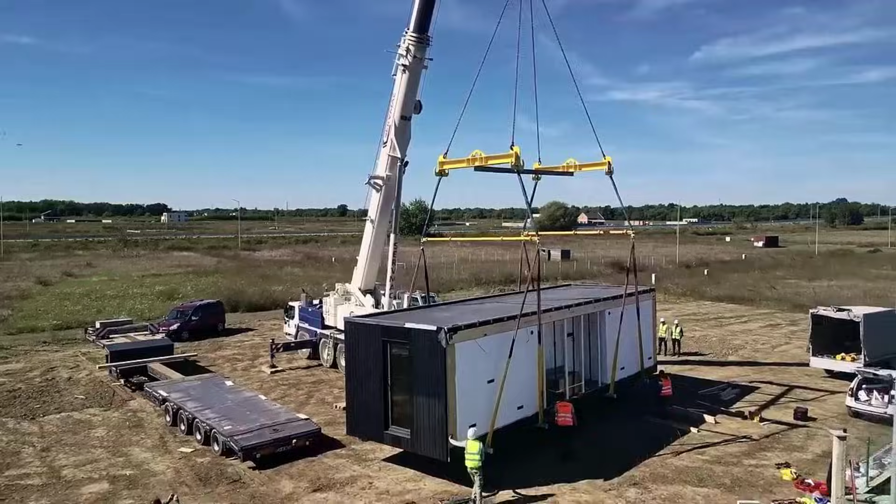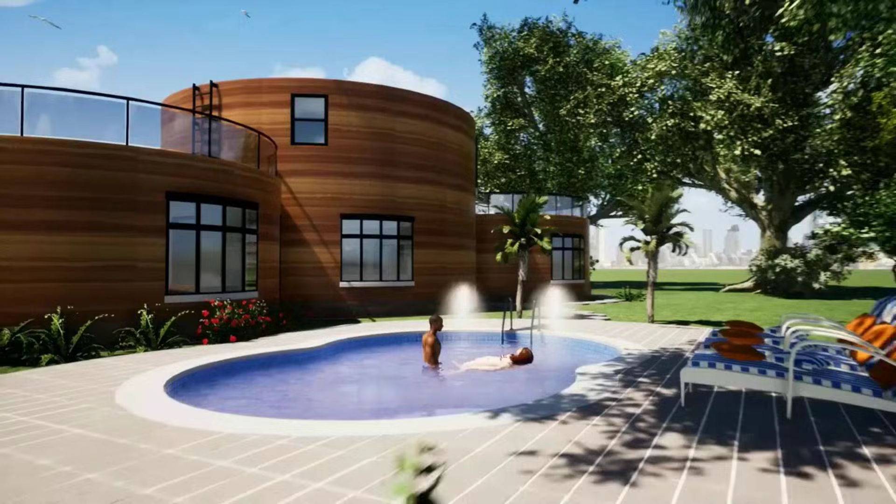We did not stop building self-heating homes because they failed. We stopped because a house that heats itself is a house that cannot be billed. A home that needs no furnace is a furnace that cannot be sold. And a family that owes nothing for warmth is a family that cannot be controlled.

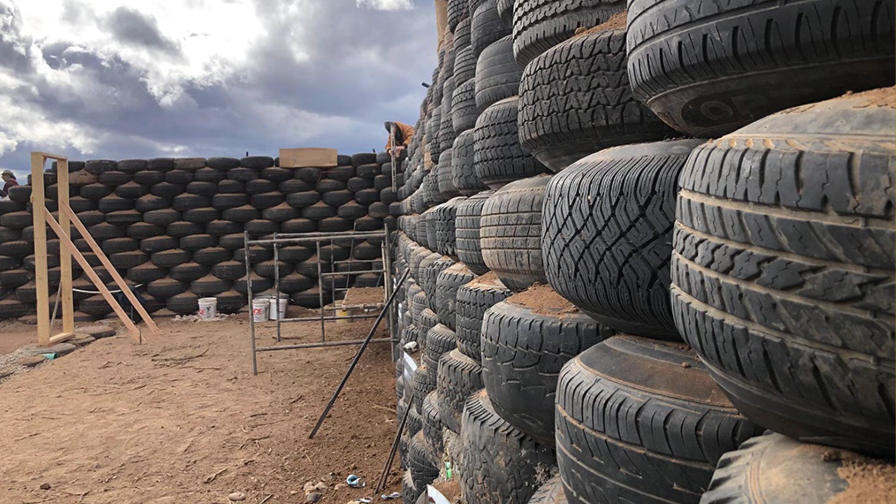This is the story of the house that needs no fuel, the building method that outlasted every empire that used it, and the industry that spent billions making sure you never learned how it works.

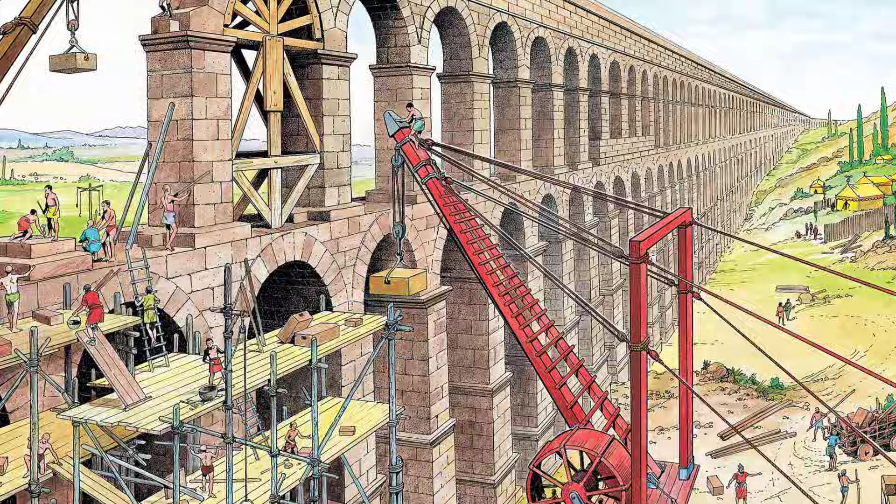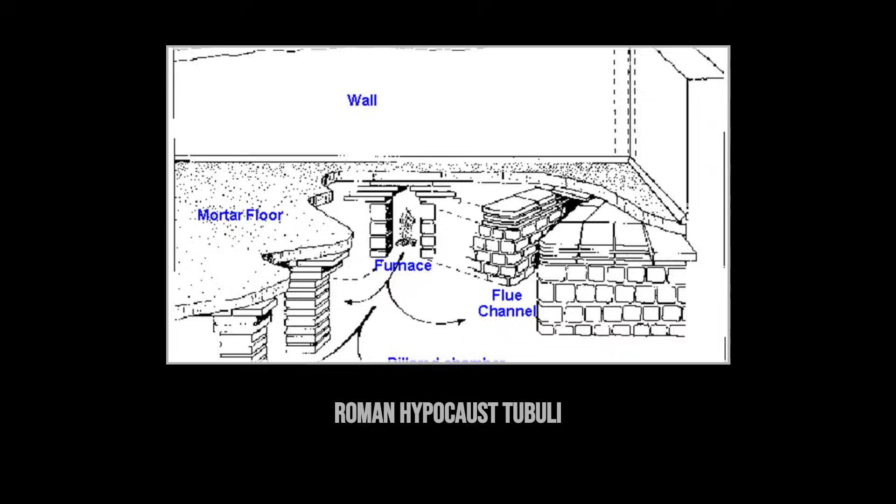500 years later, the Romans turned sunlight and stone into an engineering masterpiece. They called it the hypocaust. Picture this. A stone floor raised 2 feet on hundreds of small brick pillars called pilae. A fire burns at one end of the building. Hot air rushes beneath the raised floor, snaking through channels in the walls called tubuli. The stone absorbs that heat for hours. The fire dies. The floor stays warm.

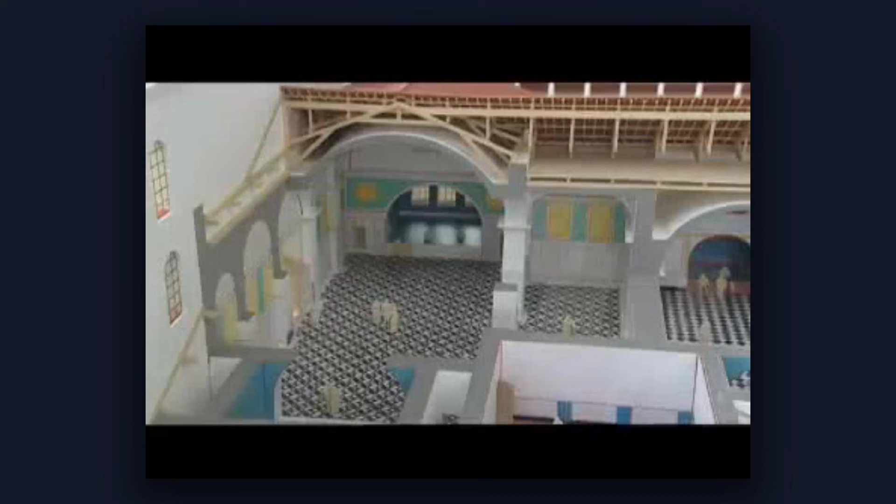In 216 AD, Emperor Caracalla opens the greatest bathhouse Rome has ever seen. The Baths of Caracalla cover 27 acres. They hold 1,600 bathers at once. The heated rooms span more than 10,000 square feet. And the entire complex is warmed by a single fire feeding hot air beneath stone floors and through hollow walls. The thermal mass of that stone held heat long after the flames went out. Bathers walked on warm floors while snow fell on Rome.

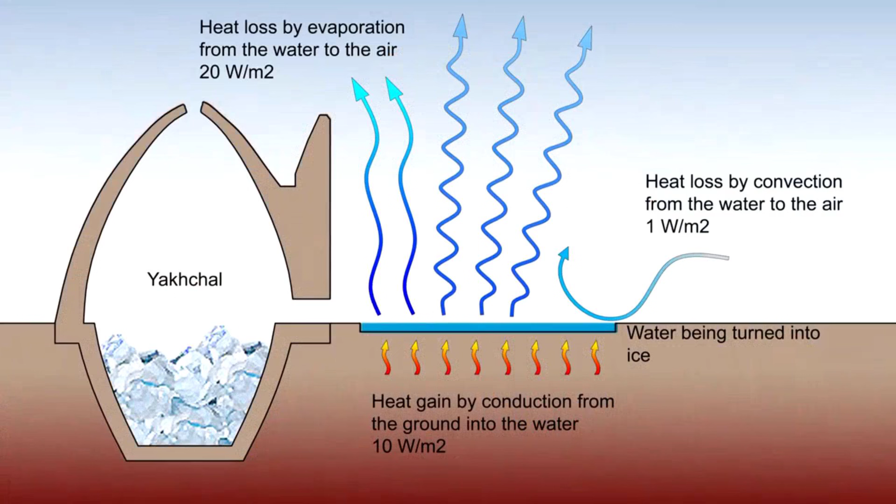Meanwhile, in Persia, builders solved the opposite problem. They kept ice frozen in the desert. They built yakhchals, domed structures with walls 6 feet thick made of packed earth mixed with lime, sand, clay, goat hair, egg whites, and ash. A recipe passed down through generations. The walls absorbed the brutal desert heat during the day and radiated it outward at night.

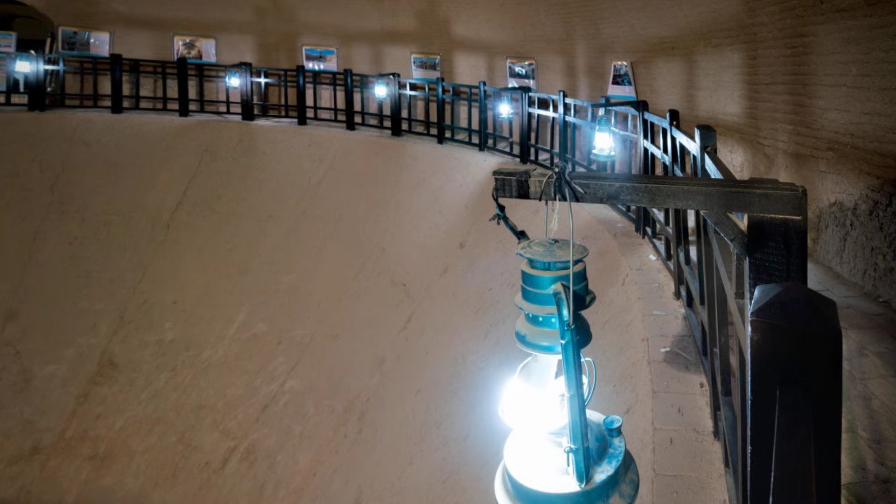Underground chambers stayed so cold that ice harvested in winter lasted through summer, in a land where daytime temperatures reached 120 degrees. The yakhchal at Abarku, Iran, still stands. It is over 2,000 years old. No electricity, no refrigerant, just physics, earth, and knowledge we chose to forget. Researchers measured the interior. When the desert outside reached 110 degrees, the chamber inside held steady near 40 degrees. A temperature difference of 70 degrees, maintained by nothing but wall thickness and geometry.

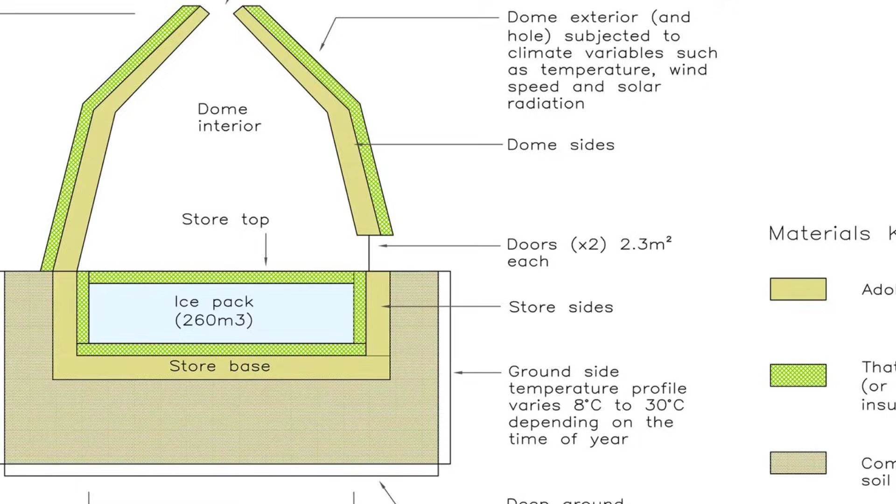By the Middle Ages, the principle had spread across Europe. Longhouses with stone walls 3 feet thick stayed warm through brutal winters. The walls worked as thermal batteries, absorbing heat from hearth fires during the day and releasing it slowly through the night. In 1881, an American scholar named Edward Morse traveled to Japan and published the first modern study of passive solar heating. He documented how Japanese houses used south-facing paper screens and dark earthen floors to capture and hold the sun's warmth. The knowledge was everywhere.

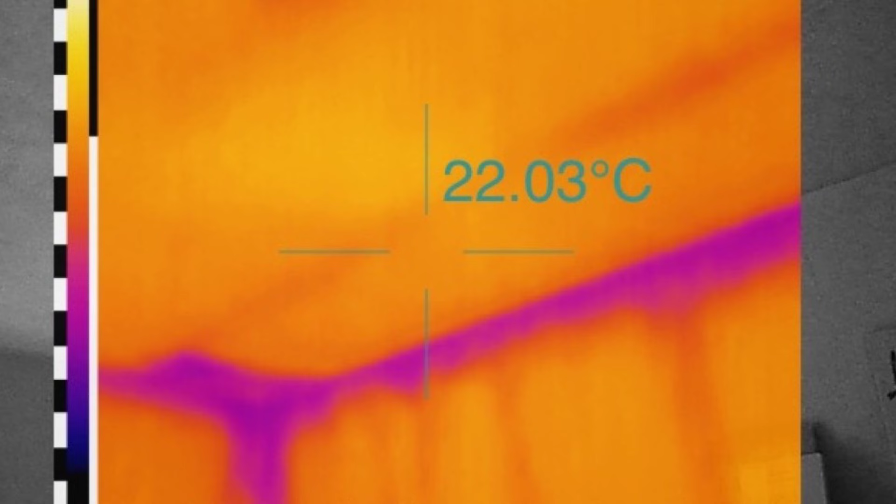Every culture that built with mass and oriented toward the sun discovered the same truth. No insulation, no ductwork, just mass. Dense material doing what dense material does, holding energy and letting it go on its own schedule. The principle is so simple, it feels like a secret.

Dense materials absorb heat: stone, earth, concrete, and water. They soak up thermal energy when the sun shines or a fire burns, and they release it slowly when the air cools. A 12-inch rammed earth wall stores enough heat to keep a room comfortable for 12 hours after the sun goes down. That is the entire principle. Thermal mass plus solar orientation equals a home that regulates its own temperature.

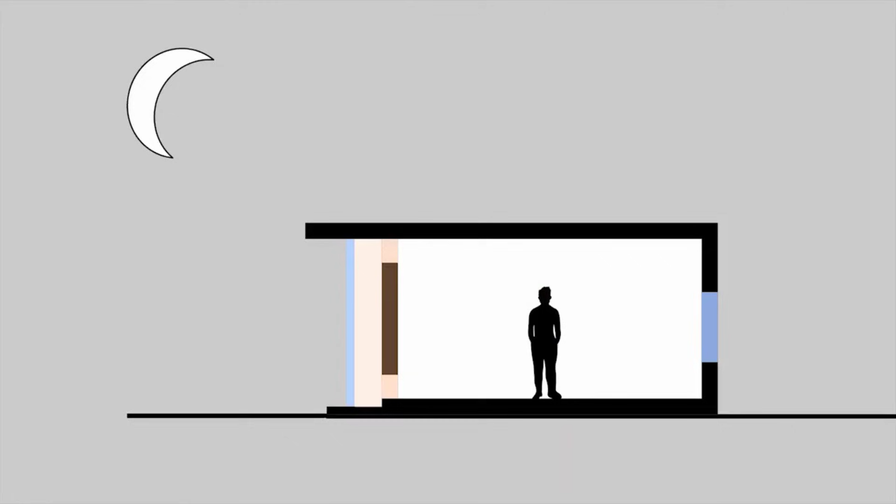In 1956, a French engineer named Felix Trombe and architect Jacques Michel turned this ancient knowledge into a modern system. They built a wall. Dark-colored masonry, 8 to 16 inches thick, placed just 1 inch behind a pane of glass on the south side of a building. Sunlight passes through the glass and strikes the dark wall. The wall absorbs that heat all day. By evening, the stored energy radiates through the wall into the living space.

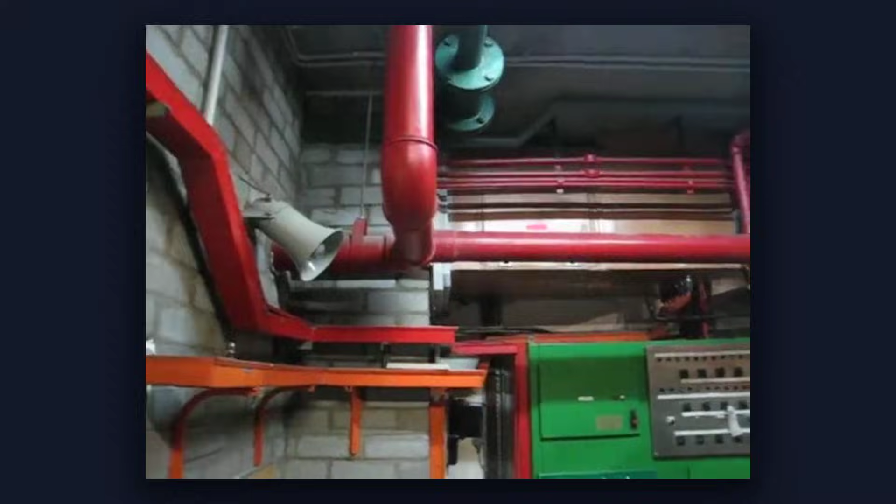Vents at the top and bottom of the wall create natural convection. Warm air rises through the top vent into the room. Cool air is drawn in through the bottom vent to be heated again. No fans, no pumps, no electricity. A Trombe wall can provide 60 to 75% of a home's heating needs in the right climate. The sun does the work. The wall does the rest.

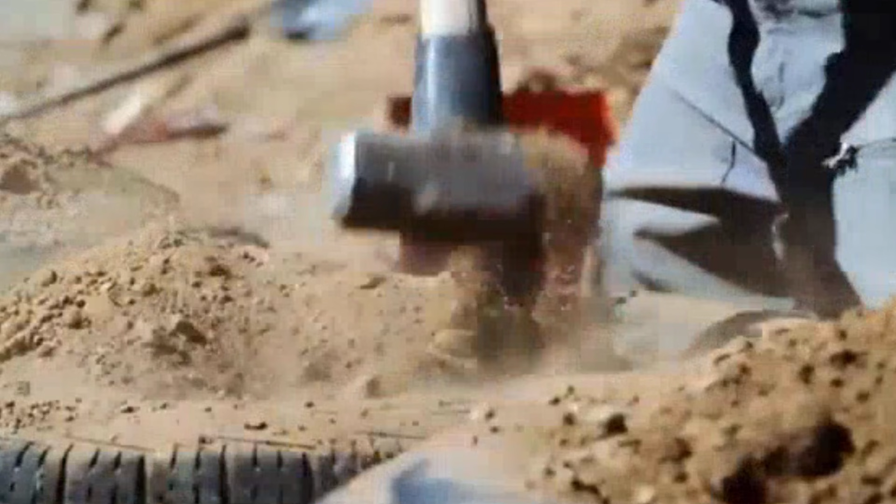Then in 1972, an architect named Mike Reynolds drove into the desert outside Taos, New Mexico, and started building something the construction industry would spend the next 50 years trying to stop. He called them Earthships. Reynolds packed old tires with rammed earth, stacking them like bricks to create walls 3 feet thick, pure thermal mass. He oriented every home to face south, with a greenhouse along the front wall to capture winter sun. The north, east, and west walls were bermed into the earth, insulated by the ground itself.

The results were staggering. Inside an Earthship in Taos, where outside temperatures swing from -10 to over 100 degrees Fahrenheit, the interior stays between 65 and 75 degrees. Year-round, no furnace, no air conditioner, no gas line, no electric heater, zero energy bills. For over 50 years, these homes have heated and cooled themselves using nothing but the sun and the earth beneath them.

The average American household spends $2,000 a year on heating and cooling. Over a 30-year mortgage, that is more than $60,000 just to stay comfortable inside walls that were never designed to hold heat. Passive solar homes use 50 to 80% less energy than conventional construction. The Department of Energy confirmed this. The numbers are not disputed, they are simply ignored.

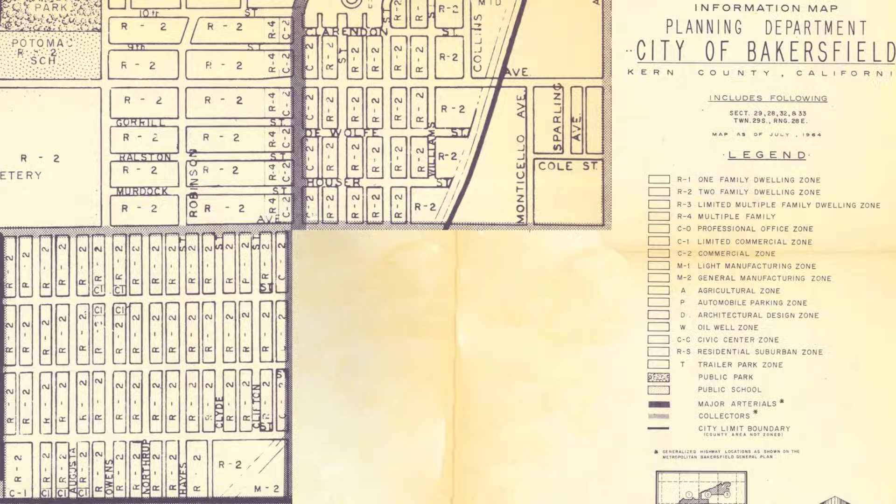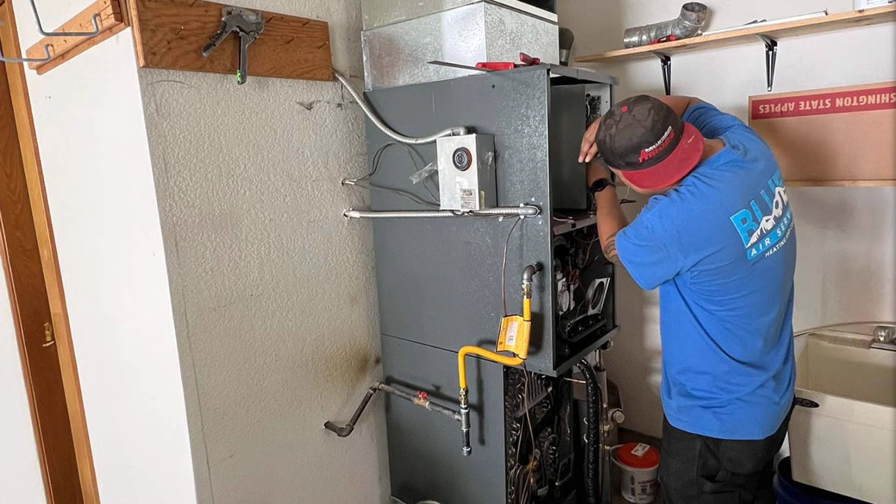Then, after 1945, something changed. The war ended. America needed houses, millions of them, fast. Developers bought open land and subdivided it into lots. The lots were oriented for maximum density and road access, not for the sun. A house facing east sold for the same price as a house facing south. Builders did not care which way the windows pointed because the natural gas was cheap. The furnace was cheaper. Install a forced air system, hook up a gas line, and send the homeowner a bill every month for the rest of their life.

The numbers tell the real story. The global heating, ventilation, and air conditioning industry is worth $240 billion a year. The United States residential natural gas heating market alone exceeds $60 billion annually. Every home built with passive solar is one fewer furnace sold, one fewer air conditioning unit installed, zero monthly revenue from a family that owes nothing for warmth. A house that heats itself is not just an engineering choice. It is a threat to one of the largest industries on Earth.

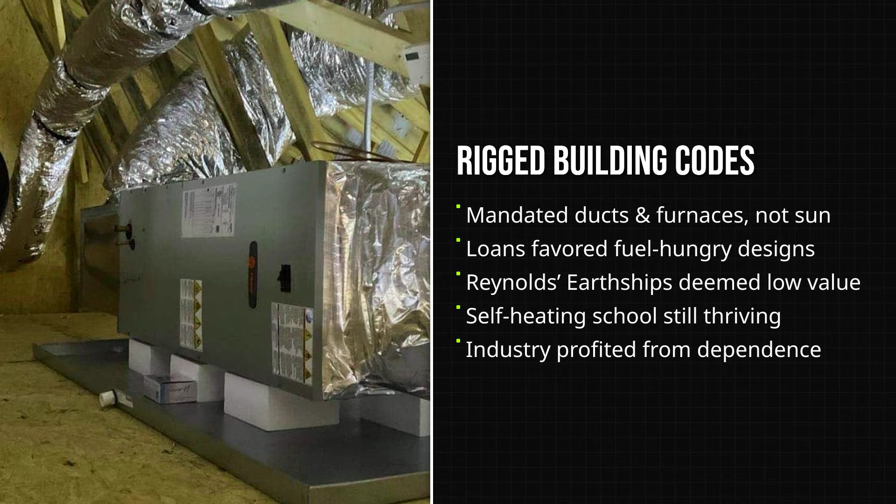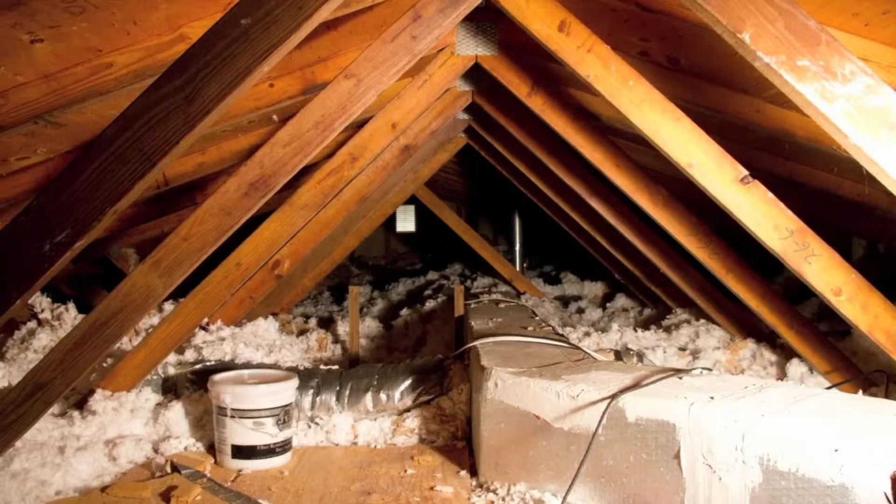Building codes became the weapon. Codes written for conventional HVAC systems required specific ductwork, specific mechanical ventilation, and specific heating capacity. Passive solar homes did not fit the forms. They did not need ducts, they did not need furnaces, but the codes required them anyway. Mike Reynolds fought building departments in New Mexico for decades. He was denied permits. He was told his Earthships did not meet code, not because they were unsafe, but because the codes had no category for a home that did not need a heating system.

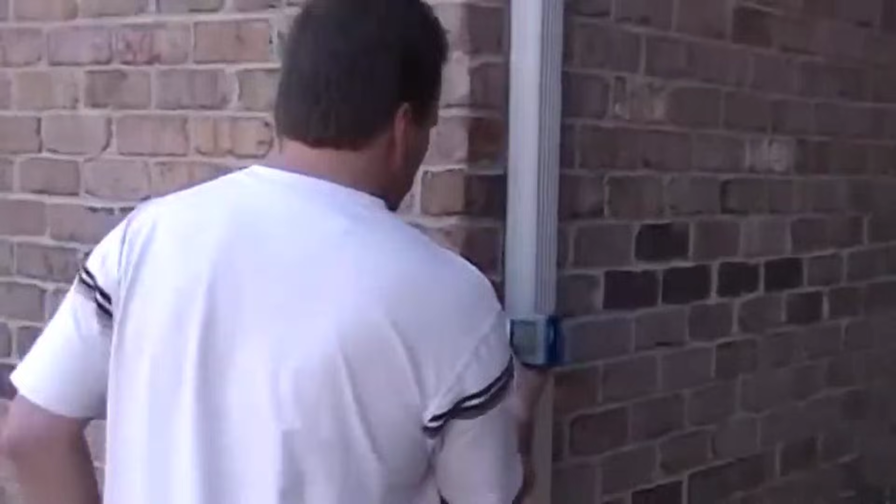It took until 2007 for New Mexico to pass the Sustainable Development Testing Sites Act, a special law just to allow Reynolds to legally build the homes he had been building for 35 years, and the financial system buried it deeper. Mortgage lenders and real estate appraisers value homes by square footage, countertops, and finishes, not by energy performance. An Earthship that costs nothing to heat appraises for less than a conventional home with granite countertops and a $400 monthly energy bill. The system rewards dependency and punishes self-sufficiency.

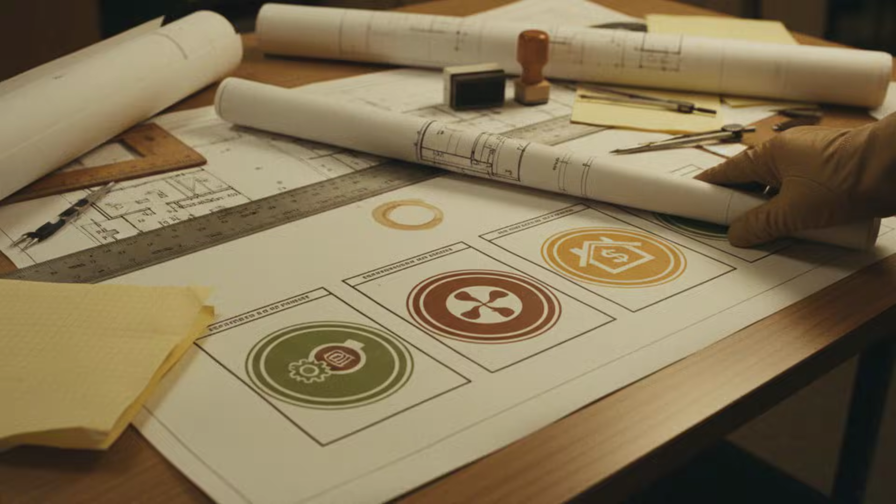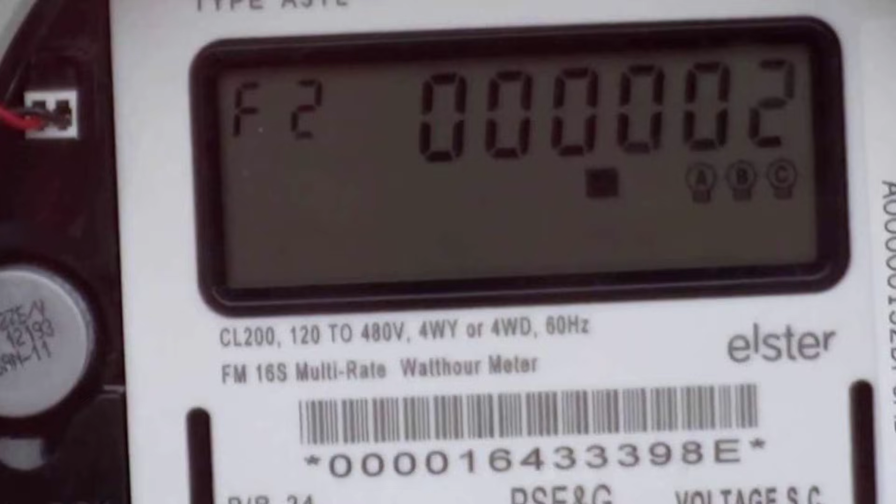A home that needs nothing is worth nothing on paper. A home that needs everything is worth a fortune in recurring revenue. The pattern is deliberate. In 1961, architects in Wallasey, England built a school heated almost entirely by passive solar design. South-facing windows, thermal mass walls, and careful ventilation. The building still functions today, more than 60 years later, using a fraction of the energy of schools built beside it. The proof was standing in plain sight.

But by the 1980s, oil prices had dropped again. Gas was cheap. The industry told homeowners to stop worrying about efficiency and start enjoying comfort that arrived through a meter, comfort with a monthly invoice. The brief passion for passive solar that had sparked during the 1970s oil crisis was quietly extinguished, not by failure, but by falling fuel prices and rising industry influence. The knowledge was not lost. It was buried under cheap gas and expensive advertising. But the physics refused to be forgotten.

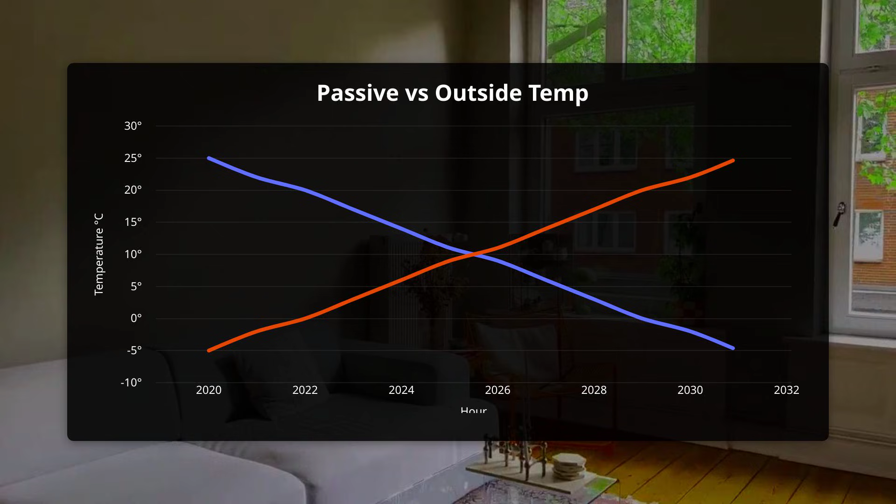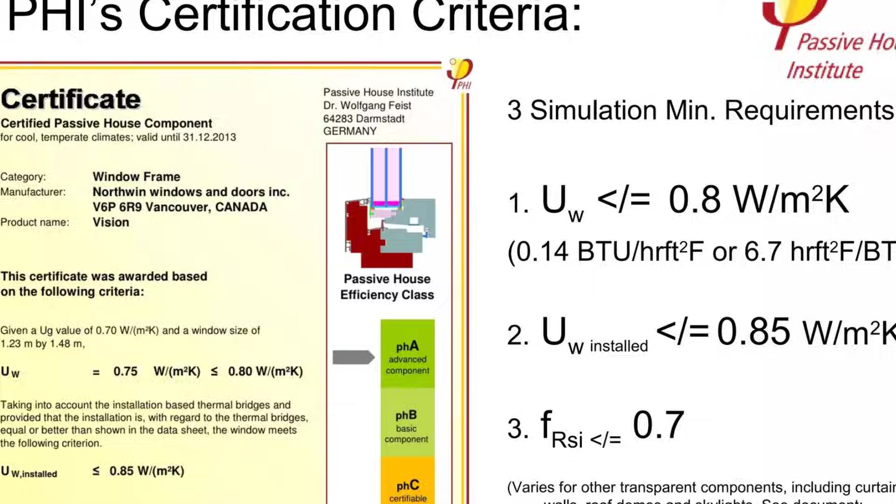In 1991, a physicist named Wolfgang Feist built a home in Darmstadt, Germany called Kranichstein. It was the first certified passive house, a building designed to need almost no active heating or cooling. Feist founded the Passive House Institute in 1996 and created a rigorous scientific standard proving that homes could maintain comfortable temperatures using passive principles alone. Today, more than 60,000 certified passive houses stand worldwide. The data is overwhelming. These homes use up to 90% less energy than conventional buildings. Not a theory, not a projection. Measured, verified, documented across thousands of structures in dozens of climates.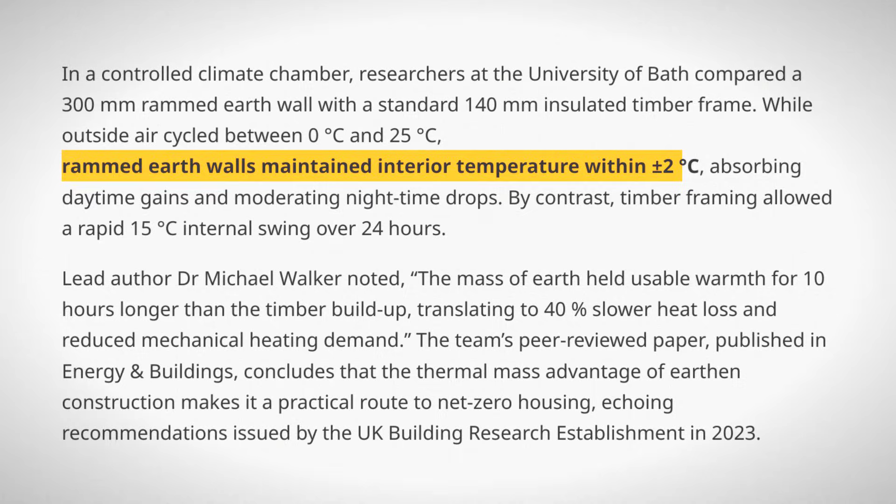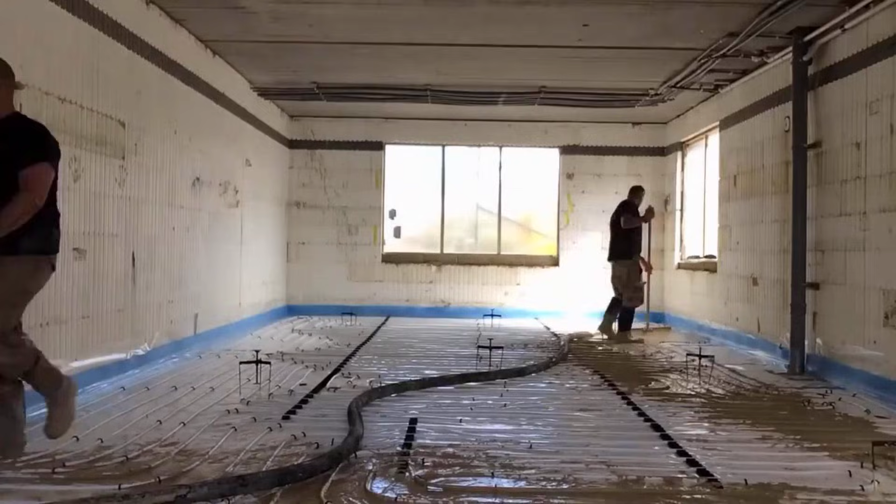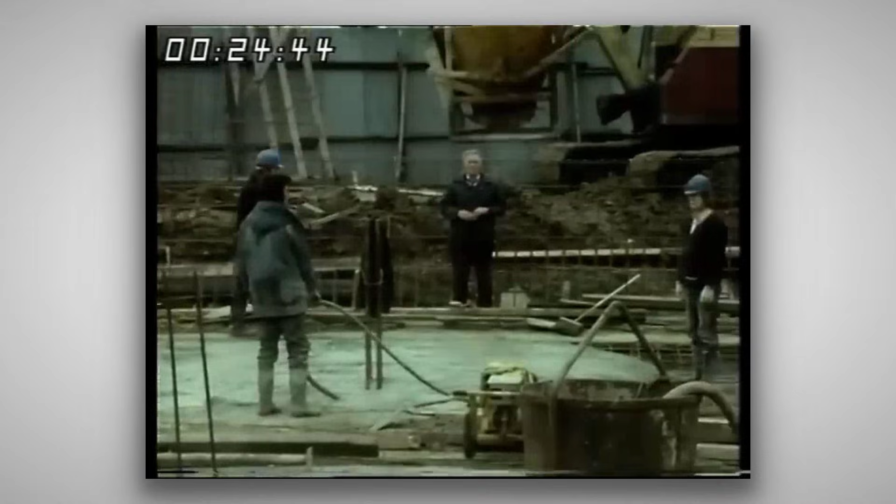The University of Bath published research showing that rammed earth walls outperform insulated timber frame walls for temperature stability. The walls hold heat longer, release it more evenly, and buffer temperature swings that conventional insulation cannot handle. In 2023, the United Kingdom Building Research Establishment recommended thermal mass as a key strategy for climate adaptation. The science is not new. It is 2,500 years old. The scientists simply confirmed what Socrates described, what Roman engineers perfected, what Persian builders mastered, and what Mike Reynolds proved in the desert. A few builders refuse to forget.

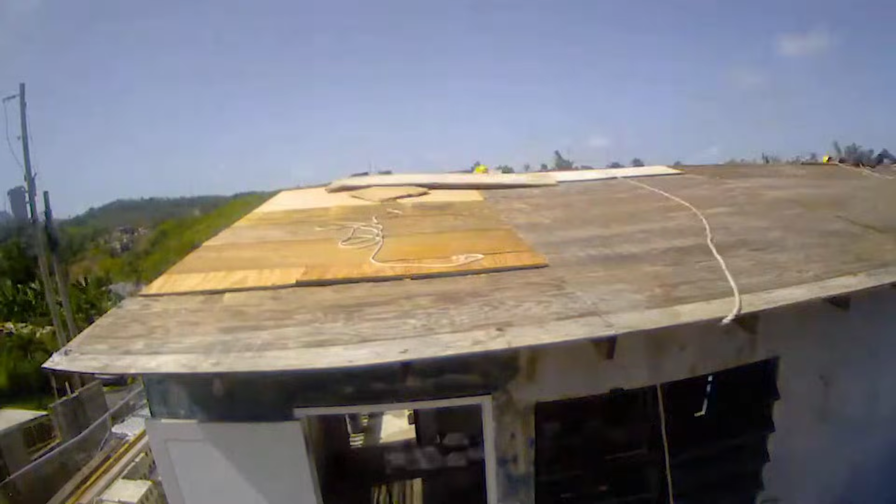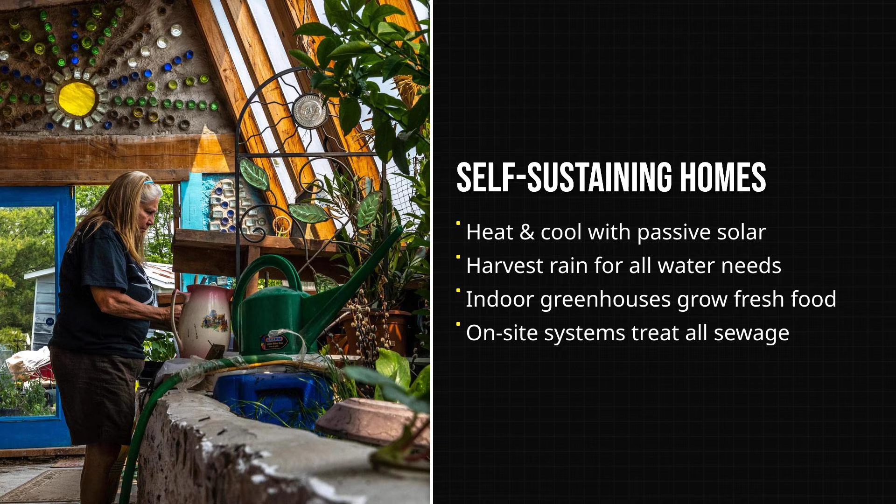Reynolds has now constructed more than 3,000 Earthships across the globe. Not just in the New Mexico desert, but in Haiti after the earthquake, in Puerto Rico after the hurricane, and in Sierra Leone. In communities where the power grid is a fantasy and monthly energy bills are impossible. These homes heat themselves, collect their own water, grow food in their own greenhouses, and treat their own sewage. Complete independence. No utility bills. No grid dependency. No monthly payment to anyone.

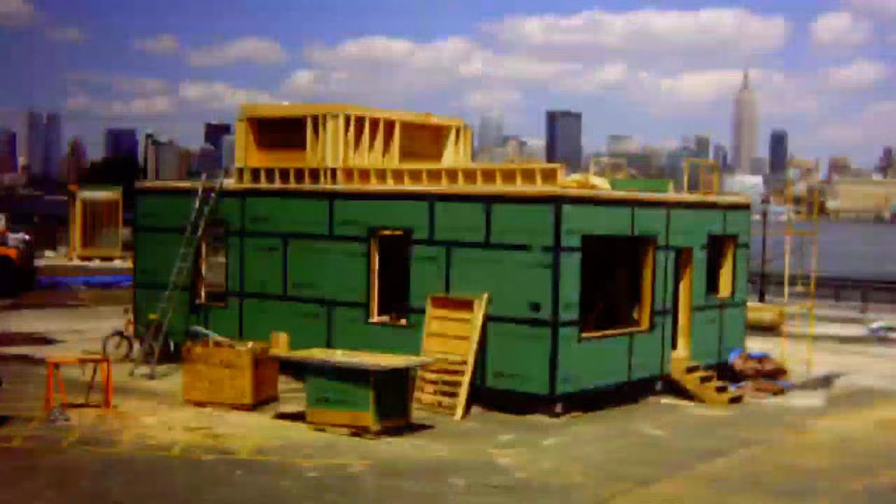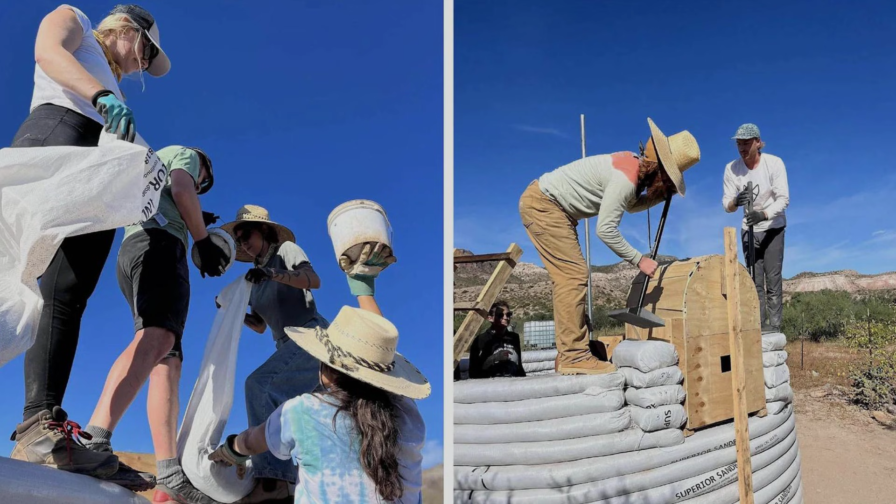The passive house movement is growing exponentially in Europe and North America. The Department of Energy runs the Solar Decathlon, a competition where university teams design and build passive solar homes. A growing community of homesteaders, builders, and do-it-yourself families are constructing Trombe walls, earth-bermed homes, and passive solar greenhouses with their own hands. A Trombe wall can be added to an existing home for a few hundred dollars in materials: south-facing glass, a dark masonry wall, and vents. No contractor required. No permit in most jurisdictions. No monthly bill ever again.

We did not lose the self-heating house. We were told to forget it. An industry worth $240 billion a year does not allow alternatives to exist in public memory. A home that needs no energy cannot generate shareholder value. A family that heats with sunlight cannot be invoiced. So the codes were written to exclude it. The appraisals were designed to devalue it. The builders were denied permits to construct it. And the knowledge was buried, not in the ground, but in plain sight, waiting.

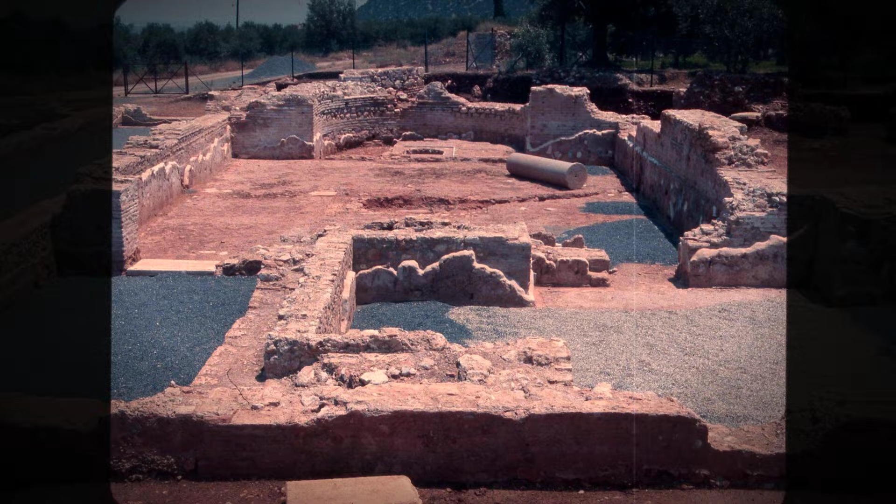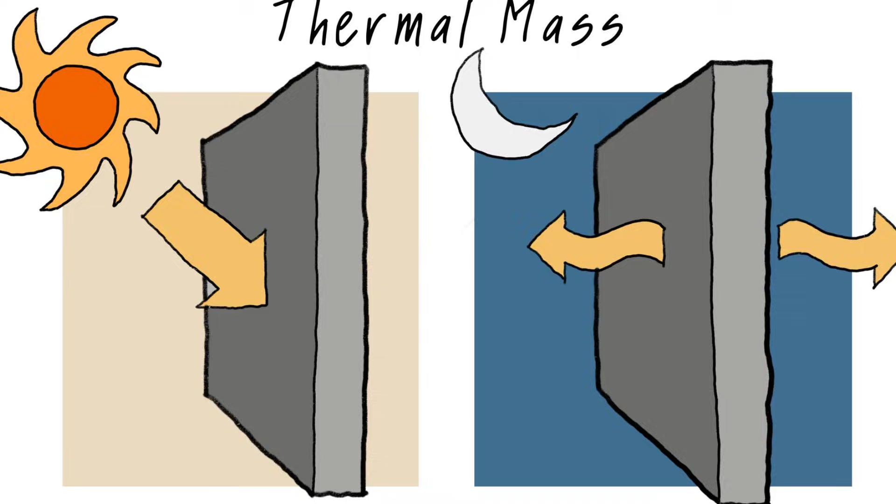Socrates described it 2,500 years ago. Build facing south, let the sun in when you need it, and block it when you do not. The Romans proved it could heat a city. The Persians proved it could freeze water in the desert. Felix Trombe proved it could heat a modern home. Mike Reynolds proved it could replace every utility bill you have ever paid. The physics has not changed. The sun still rises. Stone still holds heat. Earth still insulates. The only thing that changed is who profits when you stay cold.

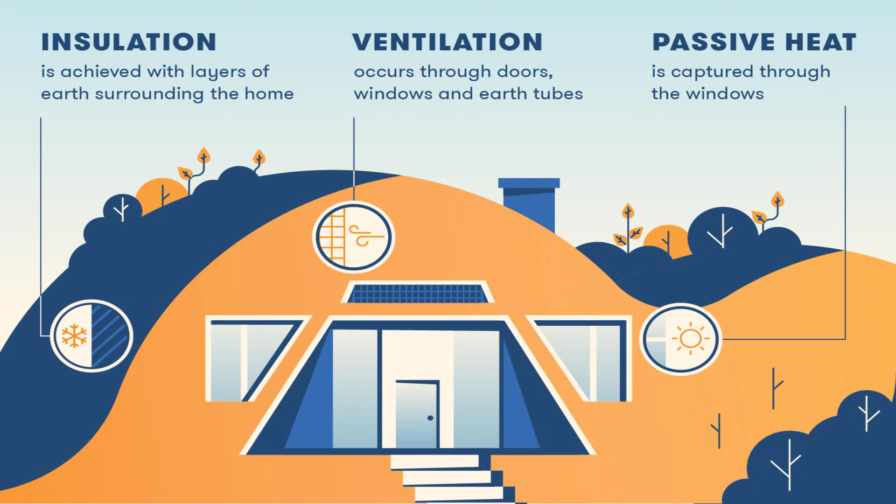Every home you have ever lived in was designed to need something you have to buy. That is not an accident. It is a business model. But the archive is open now. The knowledge is here. 3 feet of earth and a south-facing window. That is all it takes to build a house that heats itself forever.